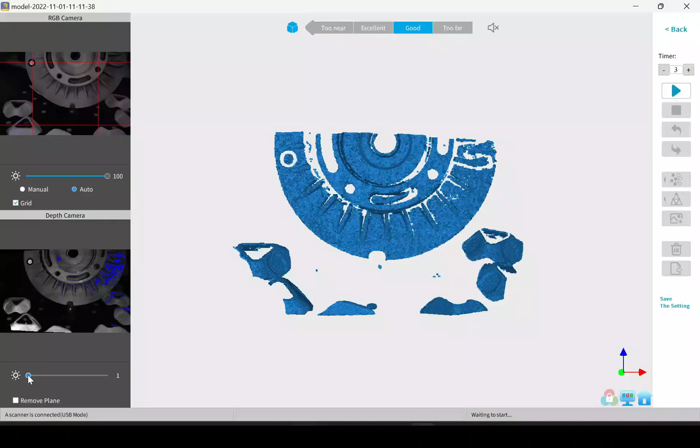This is how I would scan the back and front of this plate. You see I just put a single marker on it. It's not really for scanning, it's just simply for me to use later when I need to align it.

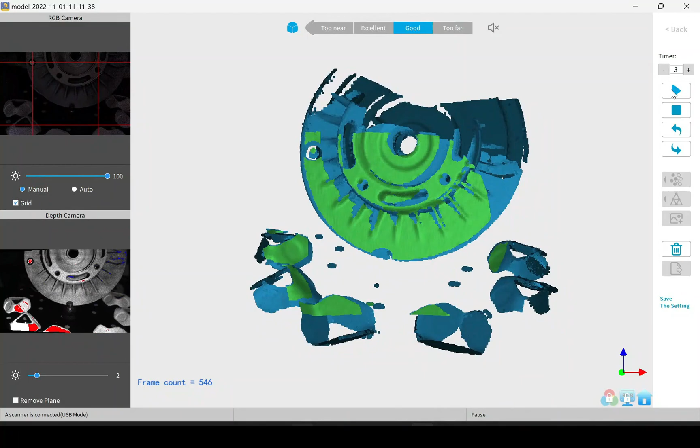I saved the file as one as this is my first scan. So this is why I add the marker to it, because what I'm going to do is simply rotate it. That way the marker's on the other side. This way I capture the top of it.

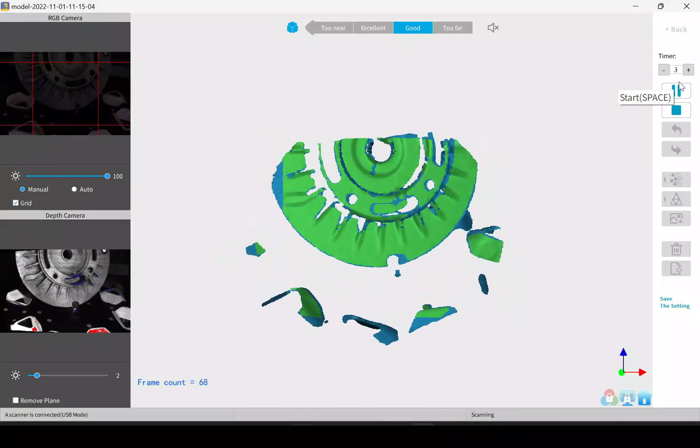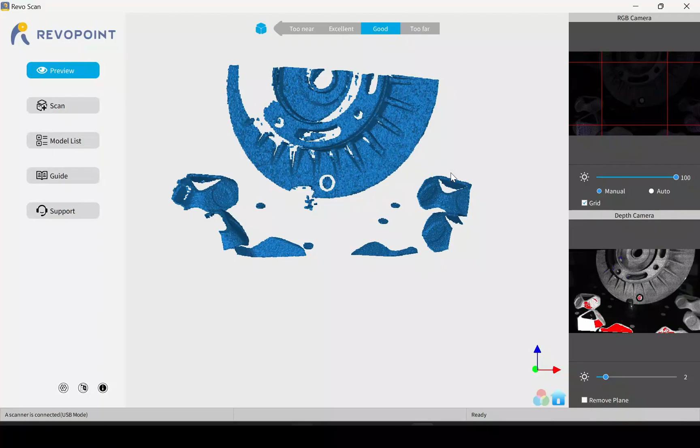Okay, this was scan 2 that I exported. Gonna rotate it one more time and then scan it again for scan 3. Scan 3 finished. Now I'm gonna take it into Revo Studio so I can clean up the scans, all three of them.

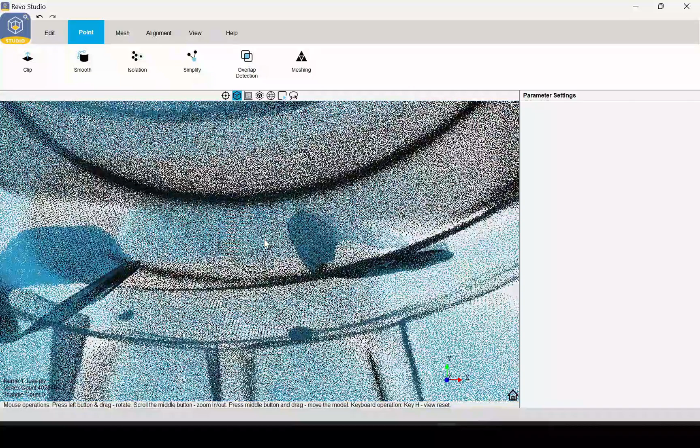When you're going to be working with multiple scans to align them, it's always best to use the point cloud, which would be the fuse, and not the mesh. I'm simply going to use the lasso tool to remove the marker parts or any other data in the scan that I don't need.

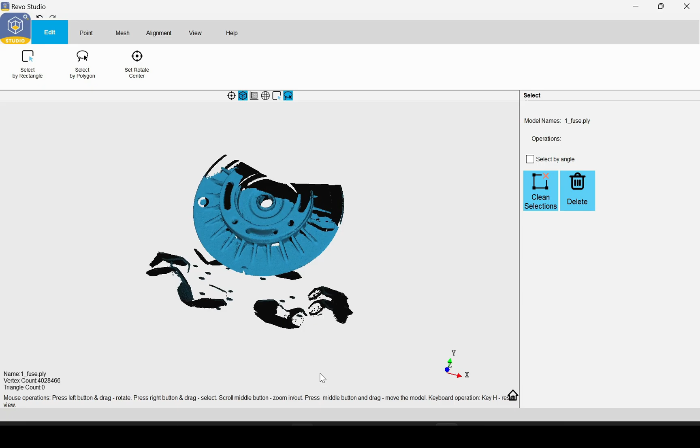This is the checkbox that I was talking about last time. If the box is checked, it's only going to delete what it sees from that frame. If you uncheck it, then it'll delete the front and the back of the point cloud.

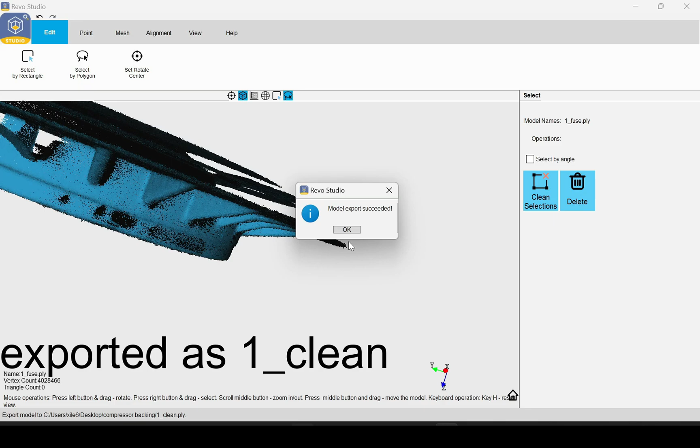Then I exported this one as one. I just labeled it as clean. That way I know that that's the mesh that's been cleaned up. And I end up doing the same for 1, 2, and 3.

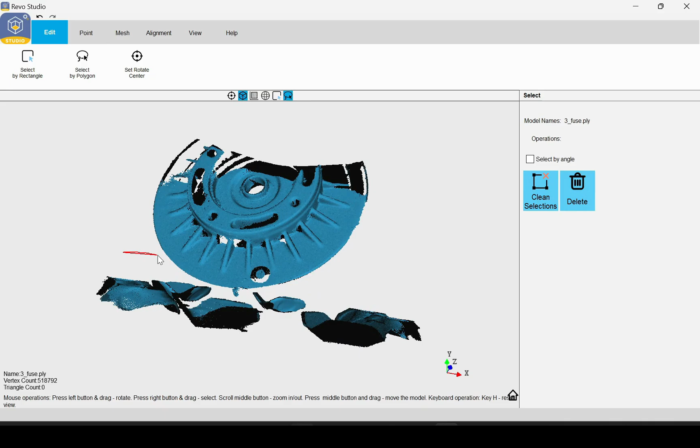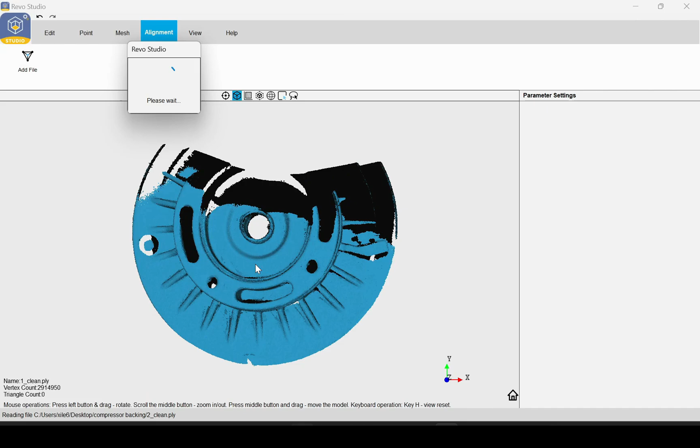Okay, now that they're all done, I'm going to start loading in the clean files. I end up loading in one, and then I'm going to add two, and I'm going to align them together. Most people just load them in and then click the feature button and hope for the best. But in my experience, I found out that does not really work that well. As you can see, it did not work. What happens is it tried to align everything just to the one side.

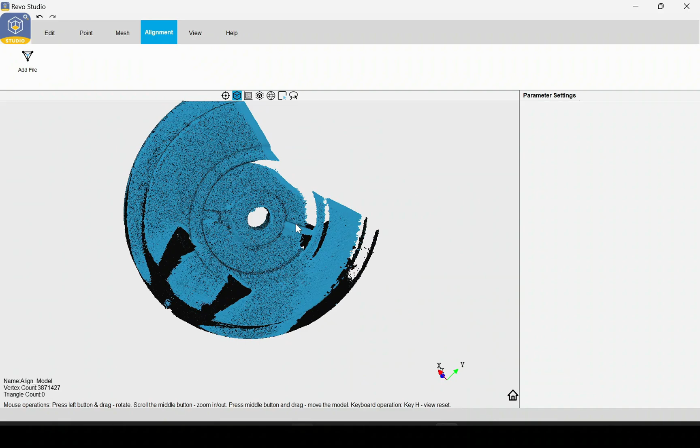So I'm going to undo that, and then I'm going to use the marker points. This is also called a manual alignment. What you do is you mark spots on one model, mark the same spots on the other model, and it will align them together based on your markings. Now you can see the reason I added a single marker to this. This allows me to line up both scans perfectly.

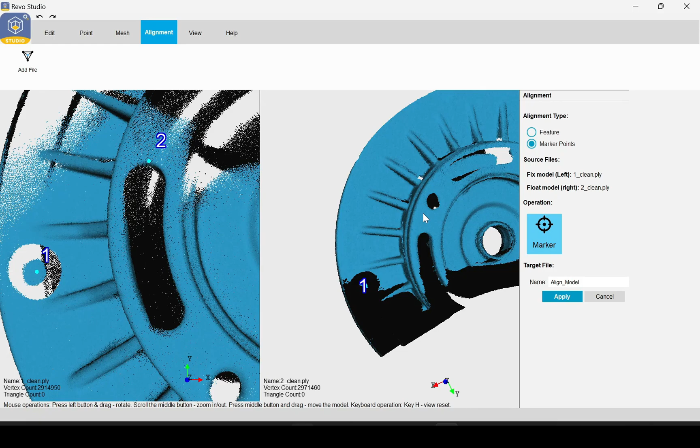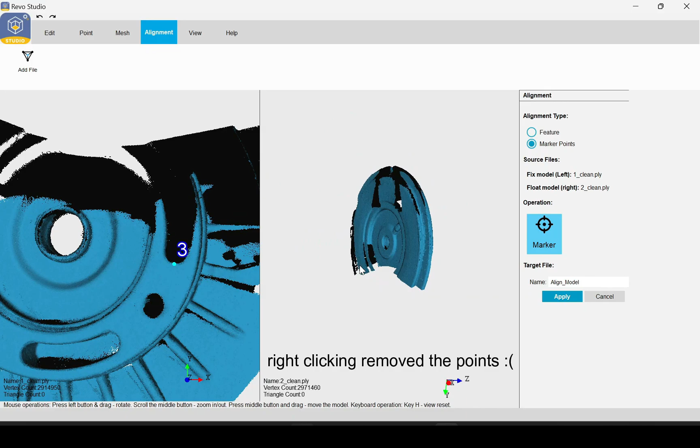Whenever you do this, you need a minimum of 3 points to align. It's always best to kind of scatter them out. You do not want them all grouped together. Then once you got at least 3 points, you can click the apply button. But what happened right here is I right clicked, and when I right clicked, it cleared all the points on the other model. So I have to redo it.

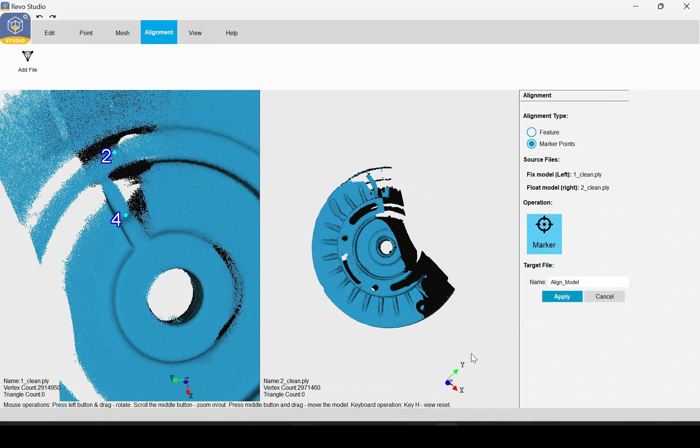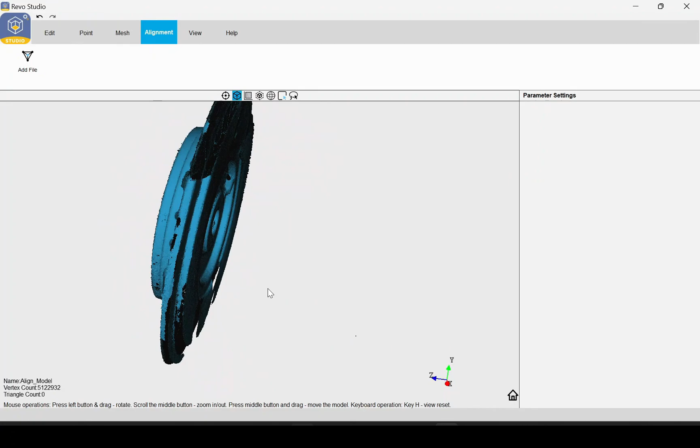Okay, and now it's finished. You can see the model is pretty much a whole as far as the scans. There are lots of holes in the model. It's just areas that did not get scanned. But you can always go back and make multiple scans just to add more data to it. But this right here is still very usable. But I'm going to go ahead and save it.

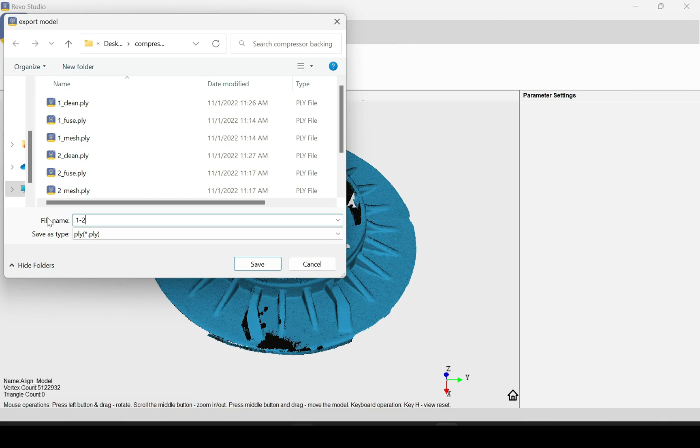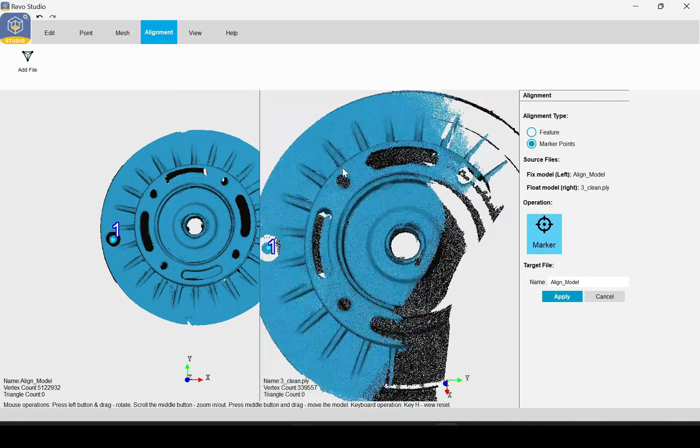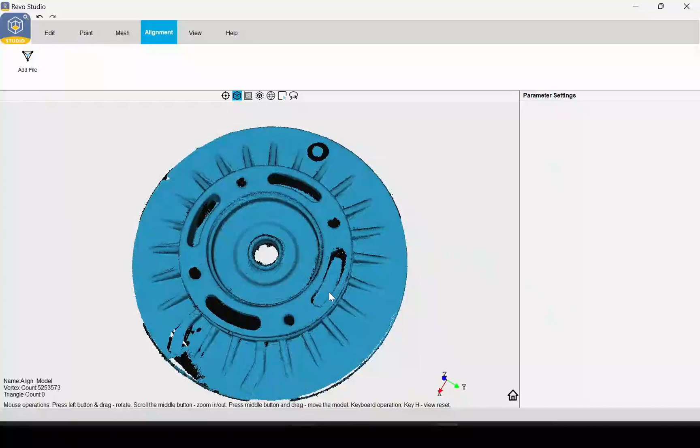And now I'm going to add in the 3. Just doing the same process here, rotating it around, lining it up, clicking the marks. And there it's finished. This is scan 1, 2, and 3 aligned together. It is a very usable scan, but it does have holes in it. All those holes are just spots that I missed when scanning. I'll go ahead and export it out. This will just be labeled 1, 2, 3.

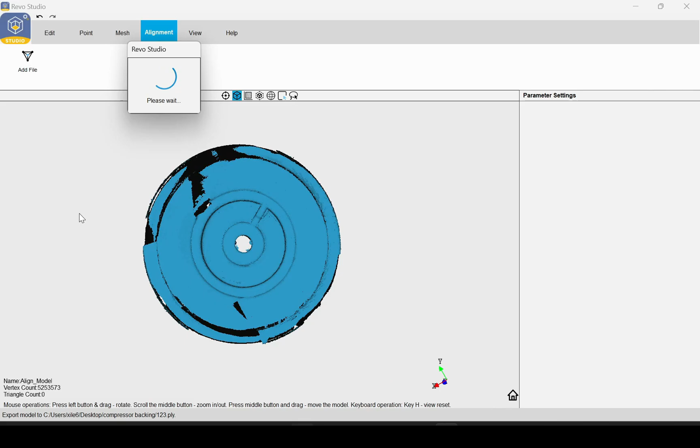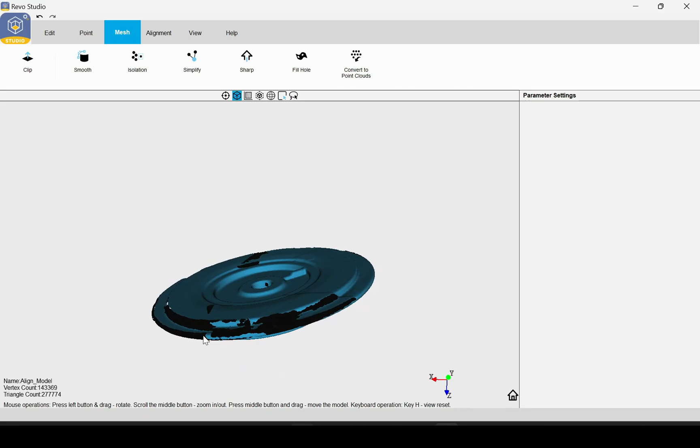I ended up meshing it just to see what it would look like. Overall, I wasn't happy with the results. There was a lot missing on the sides. So what I end up deciding to do is just to simply do some more scans on it, so I can get the top portion and the bottom portion in their own scan. Here's a sped up version of me scanning it.

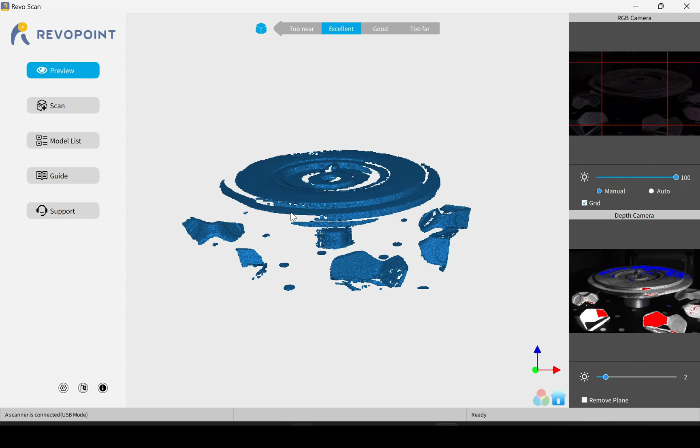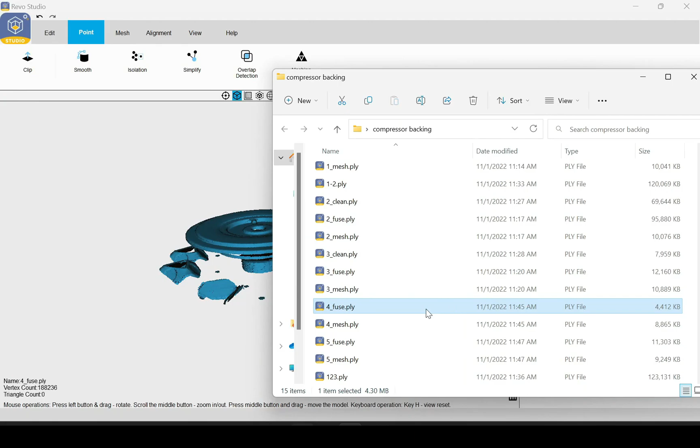I just saved it out as number 4 since it's the 4th scan. Then I flipped it over so I can get the other side. By the way, I am using the dual axis turntable in the Android app to control it. Right here, I just have it tilted at, I believe, a 6 or 8 degree angle. All right, both scans finished. Same thing, clean them up, and then add them to the main scan.

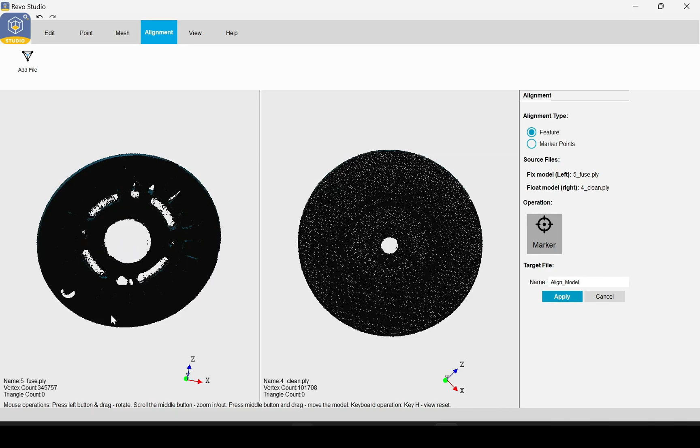Right here, I import just the front and the back just to show you that if you scan only the front and the back, there's no way for you to align them. There's simply no data that they share besides the thin little side strip, which simply isn't enough to align them correctly.

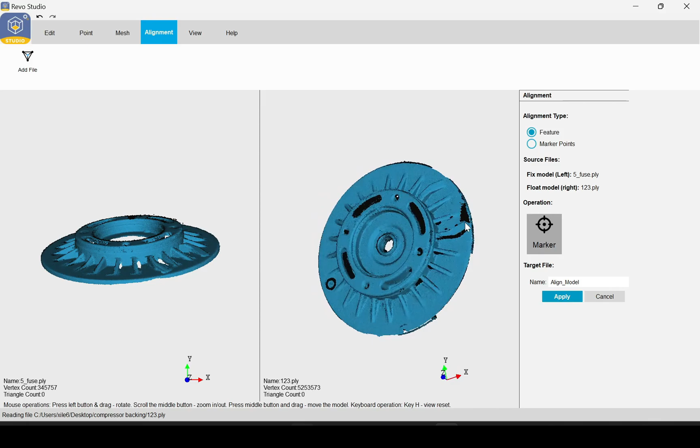Okay, import the 123 file, which is the main scan, and I'm going to add this scan to that scan. It's all the same process. Pick a couple of points and just align it together. And you can see how it fills in more of the missing holes. Then I'm going to do the same thing to the top portion.

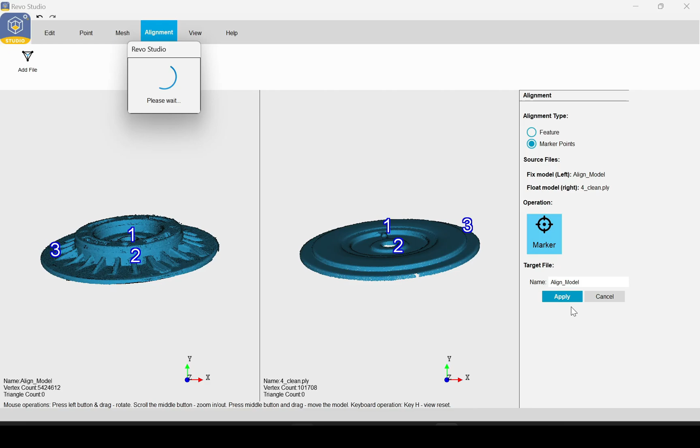And here's the final result. There's still a few holes that are there, but for the most part, everything that's important is there. So I'm just going to go ahead and export it.

You can tell I'm a gamer, cautious saver.